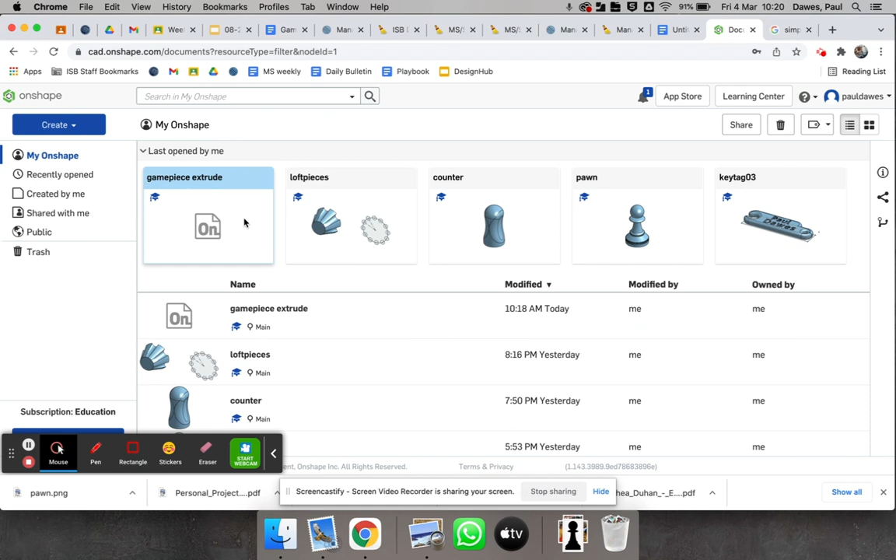Okay, so what I'll do is I'll go into here. I've already opened up a new file. I've already gone to Onshape. I've already gone to Create, and it's actually this one here. I've gone to Game Piece, and I call mine Game Piece Extrude. And the first thing I'll do is I'll sketch. I'm going to sketch on the top face there.

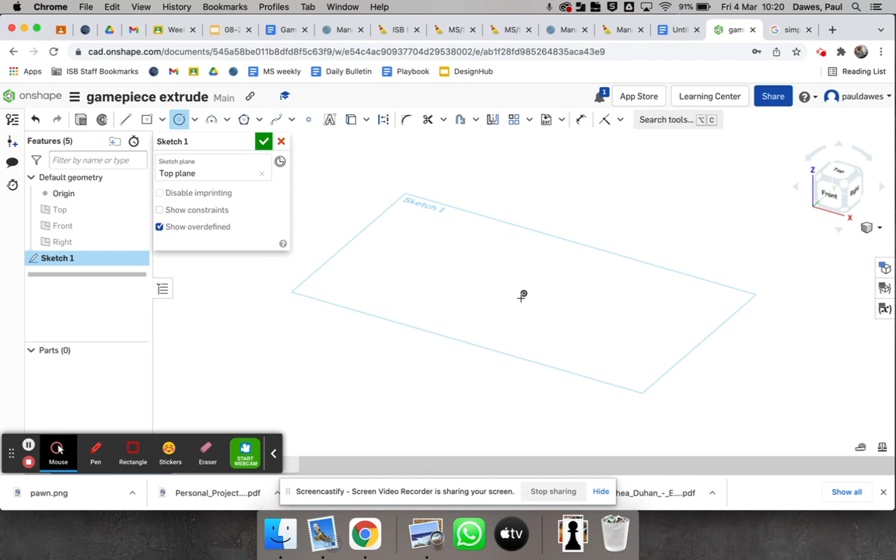Okay. Now that I've got the top face chosen, I'm going to turn that off so that I don't have to see all that ugly stuff. Yeah, great. And the first thing I'm going to do is I'm going to draw a circle. I'm going to draw the circle from here, and I'm going to make it that big. I don't know, how big is that big? It says it's 67 millimeters.

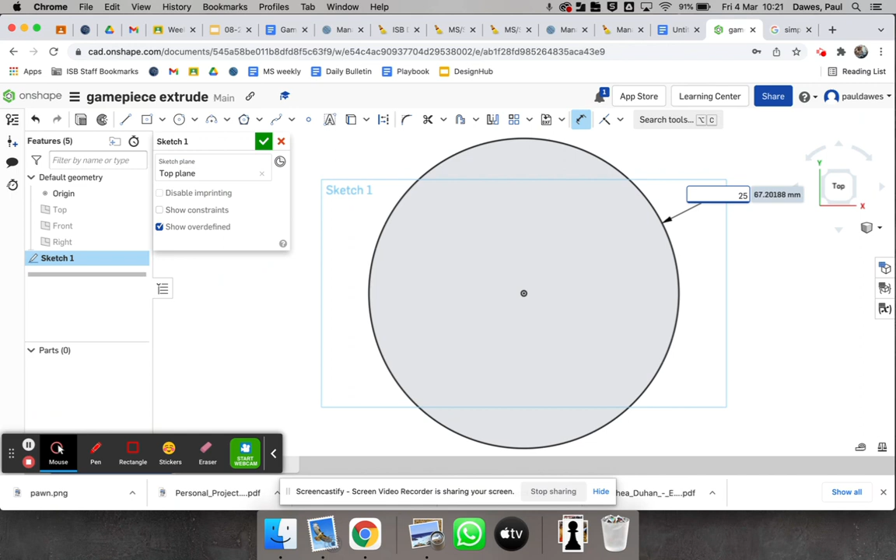That's far too big. If I'm going to be making a game piece, I reckon it probably needs, oops, come on, click, dimension. What did I just do? Dimension. There you go. Maybe it's going to be 25 millimeters. Maybe 20 millimeters. I'll make it 25 millimeters. 25 millimeters looks about right to me. Now that's my shape. It's just a circle, yeah.

But you might decide to draw something that's in the shape of a car, or something that's in the shape of a bicycle, you know, something like that. Whatever it is that suits yours, you know, pizza roller or whatever it is that you're going to do, yeah. So I've got the first one done like that, and that's all I'm going to do for my sketch. I'm going to hit OK. I'm going to go back to here, and you can see that that's there like that.

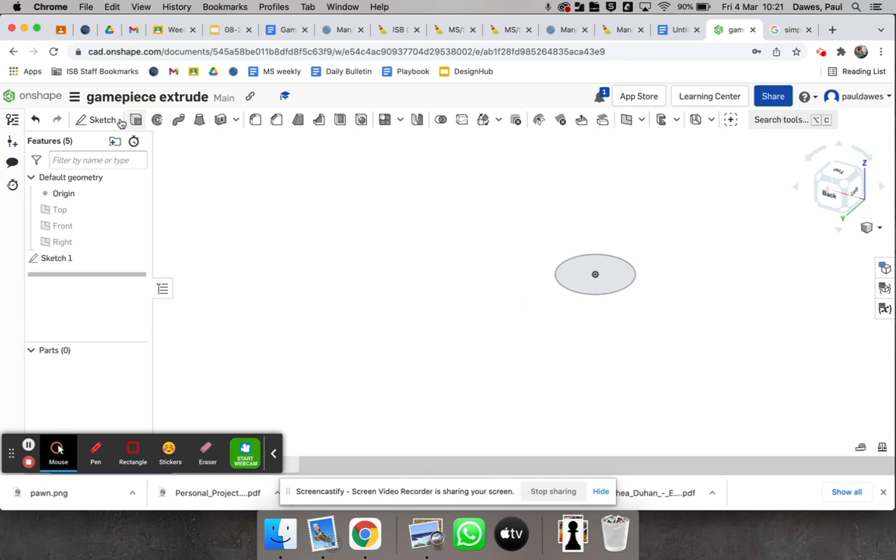Okay. So the next thing I'm going to do is I'm going to extrude it. So I'm going to grab that. I'm going to extrude it up. 25 millimeters is the default. I'm going to make it 50 millimeters. Yeah. Hit enter, and I'll just go back to there so it zooms it out a bit, and that's it. Yeah. So that's my piece finished.

It's pretty boring. So what I might do is I might go to this fillet. Yeah. And I'm going to fillet that down. Not 4 millimeters. Let's try it. I said it was 25 millimeters, didn't I? So I might make it 12.5. If I said 25 millimeters diameter, 12.5. I see it goes red, so I can't do that.

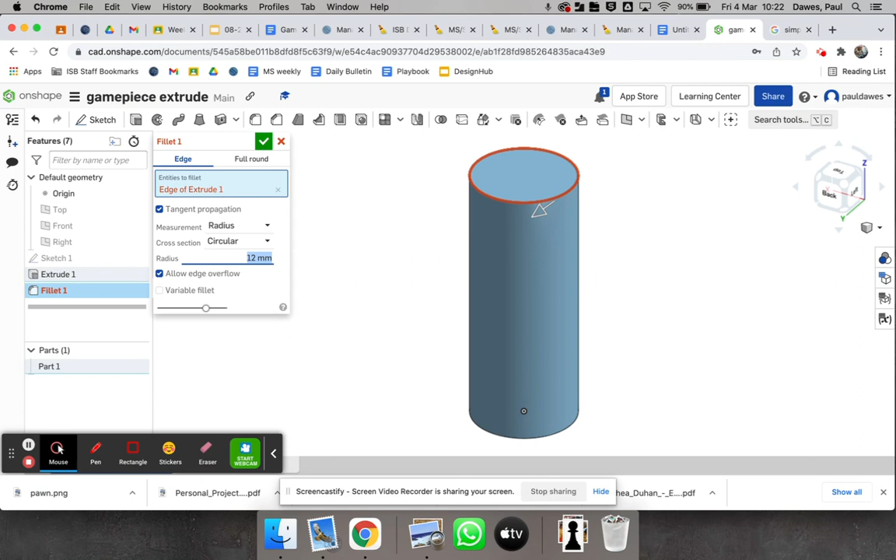What happens if I say 12? Oh, maybe I made it 20 millimeters instead. How about 10? Yeah, 10 millimeters works fine. Okay, great. That's it. Done. Happy. Okay, so it's pretty boring. So I'm going to add something else on. I'm going to go to that face there, and I'm actually going to turn the front face on.

Yeah, and what I'm going to do is I'm going to sketch here on this face here, but I'm going to draw a construction line, yeah? And this here is a construction line. So if I click that, and then I'm going to do a center point rectangle, and then I click that. Note that if I go center point and then the lines, can you see how the lines are dashed and dotted? They're dashed and dotted because they're imaginary lines.

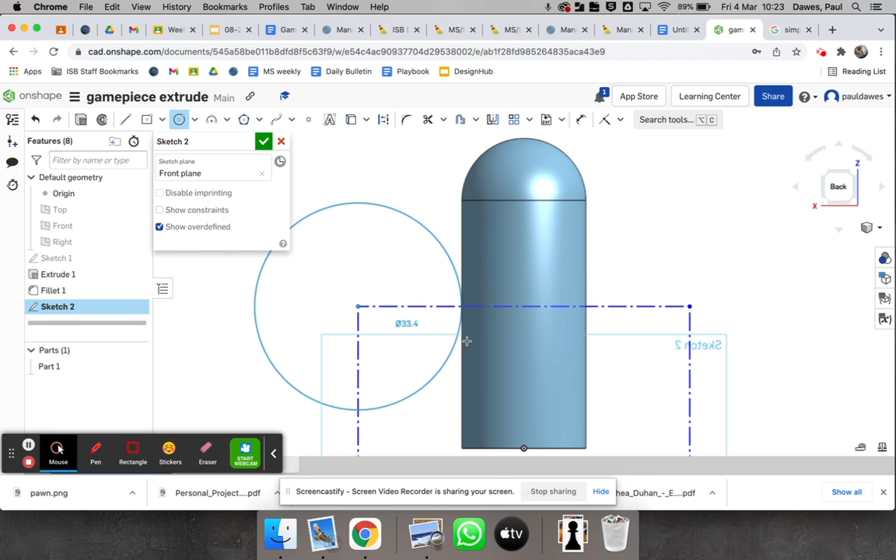So imagine if you're drawing a drawing, it's the pencil line that you will erase. Yeah. So I've just drawn a square like that only because I figure that's the easiest thing to do. And now I'm going to turn that off. I'm going to go to circle, and you'll see what I'm going to do in a tick. I'm going to grab that out there. I'm going to pull that out to about there. I'm going to do the same thing here. I'm going to draw a circle there and draw a circle there.

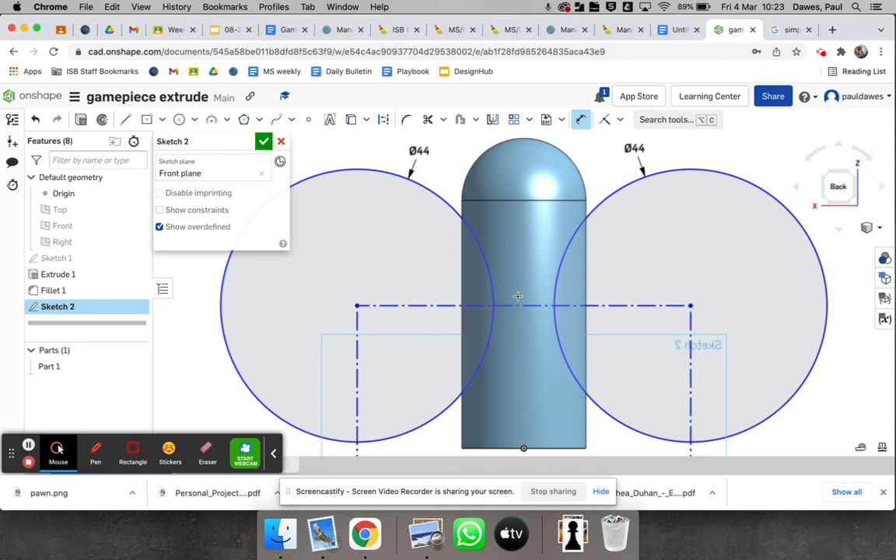Okay. I'm going to go to the dimension tool. I'm going to click on that. I'm going to make that, let's say 44 millimeters, because that looks good. And I'm going to go to that, and I'll make that one 44 millimeters as well. So what I've done now is I've created two circles that are the same distance away from the center point of this extruded piece. Okay, so I'm going to hit OK, and I'll go back to here, and hopefully you can now see what I've got.

Yeah. So I don't know that you can guess what I'm about to do, but I'm going to use the extrude command again, and I'm going to go to extrude. I'm going to extrude that one and that one. I'm not going to add, I'm going to remove. I'm not just going to take it from one side, I'm actually going to take it symmetrically away. Can you see what's happening now? I'm removing that part there.

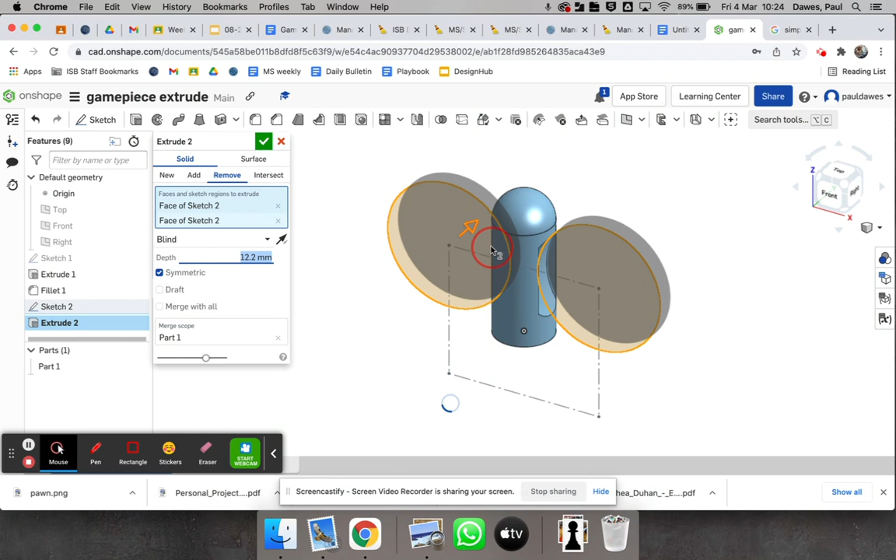So blind 25 millimeters will work, yeah. Sometimes you might need to make it larger, and it doesn't matter how big you make this. Obviously if you make it not big enough, then it's not going to extrude everything. You can see that. Oh, that's actually quite cool. It just takes that much off there. But I'm going to take the whole lot off like that. And then I'm going to hit OK.

So now you can see that I've got a piece that's got a little bit more of an ergonomic feel to it, I guess. Yeah. So I like that. But the last thing I'll do, and again, you will find that the majority of your features are going to be extrudes and fillets. Yeah. So I'm going to go and fillet. I'm going to hit that one there. I'm going to hit that one there. That fillet there and that fillet there.

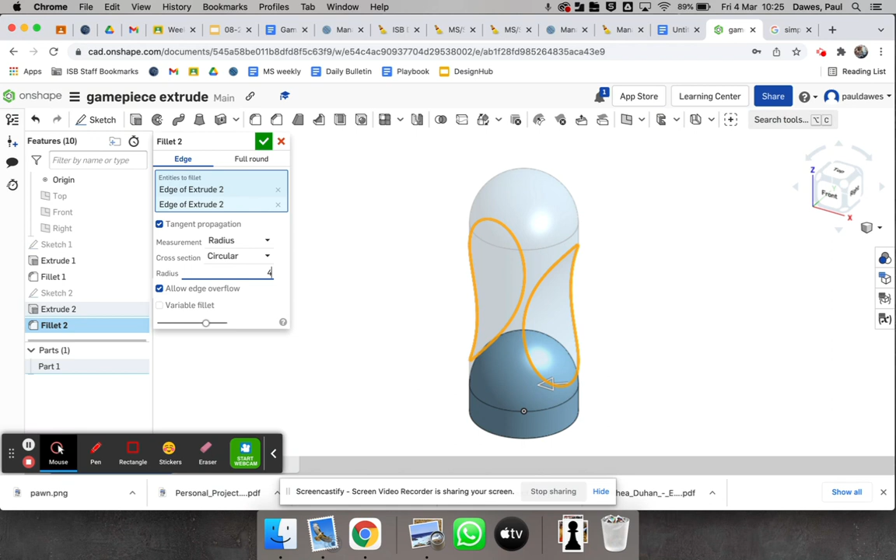You can see a 10mm fillet will end up making it look like that, which is no good. So I'm going to try a 4mm fillet. Yeah. And now it rounds those edges off to make it just nice and a little bit more ergonomic for when I'm using the piece to move it around the board. Now that's 25mm in 20mm in diameter and about 50mm tall, and that looks okay.

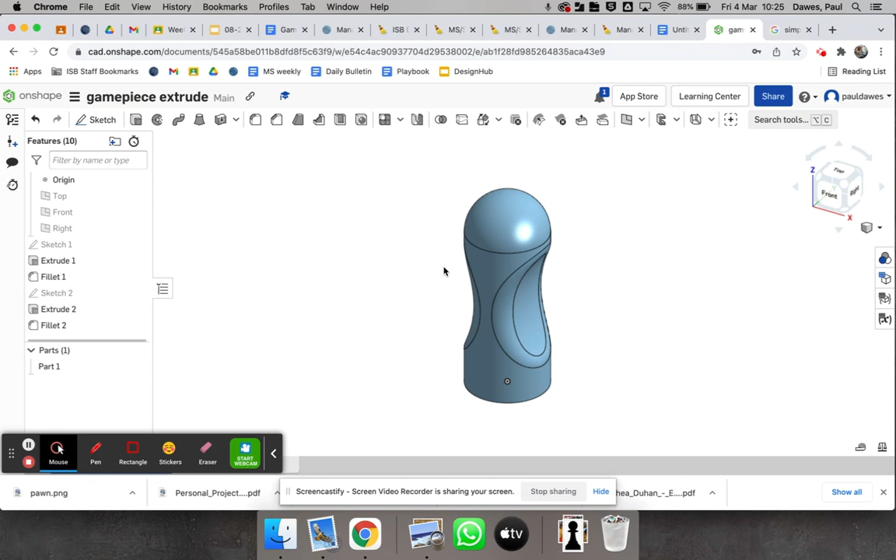Yeah. And if you're making some plain old pieces like that, then sure you can do that. You could combine this way of creating a piece with other ways of creating pieces, and I'm going to show you some other ways of creating pieces in my next couple of videos. Okay.